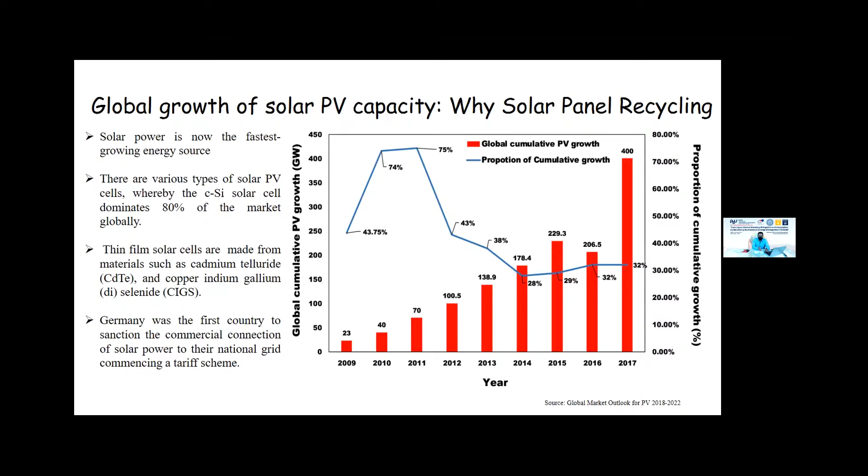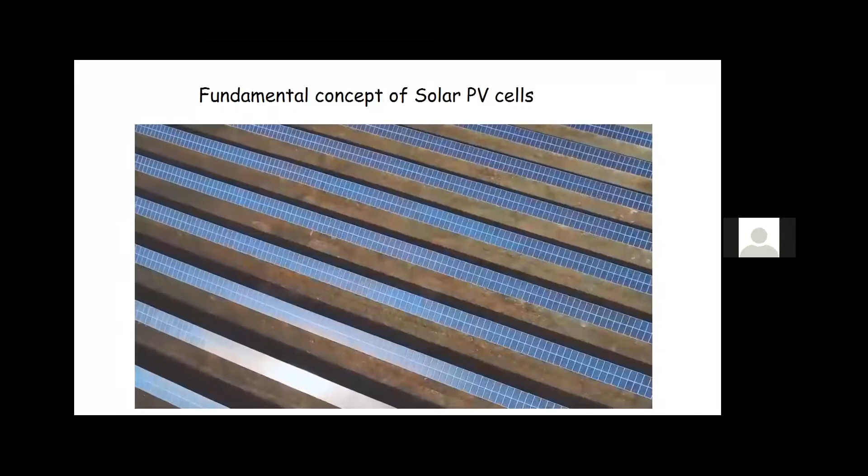Video sound is okay? Yes, sir. We can hear it clearly. At this time, there is no sound, sir. No sound? Yes, sir. No sound. Okay. Okay, wait. Stop sharing.

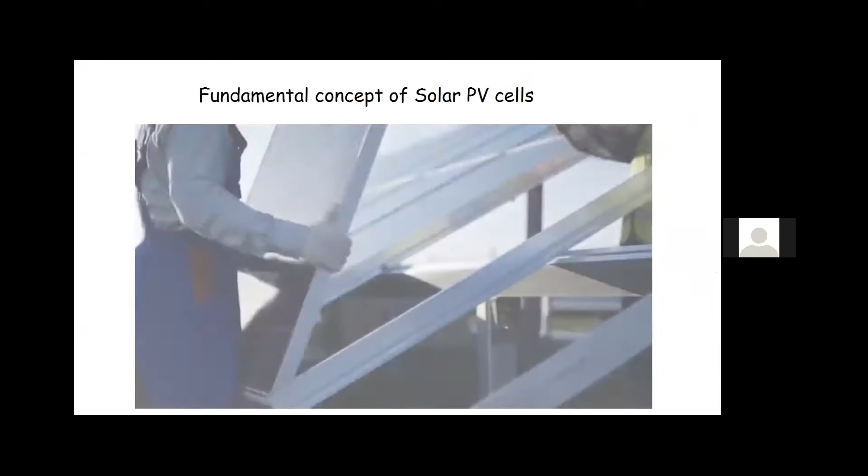This episode of Real Engineering is brought to you by Brilliant, the problem-solving website that teaches you to think like an engineer. Installed global capacity of solar cells has increased year on year for the past decade, fueled by the plummeting prices and rising efficiency of solar cells, forcing fossil fuel producers out of the market through technological advance. At the end of 2019, the total installed capacity of photovoltaic cells exceeded 630,000 megawatts, an astounding figure that is going to continue to rise in the coming decades.

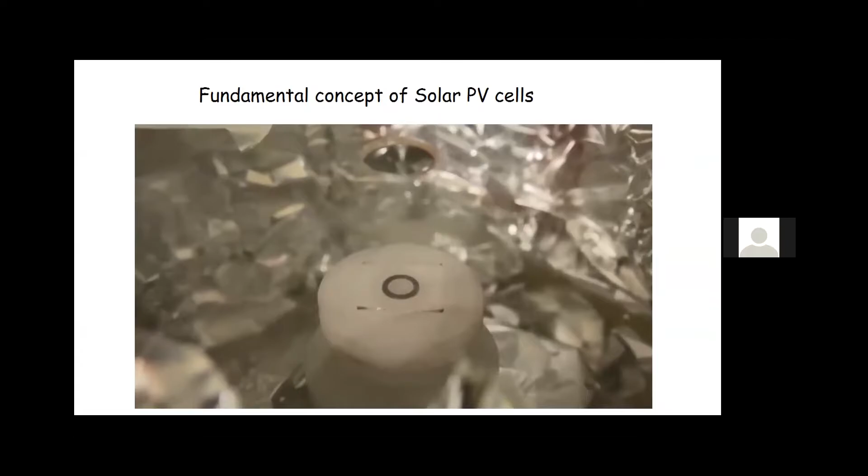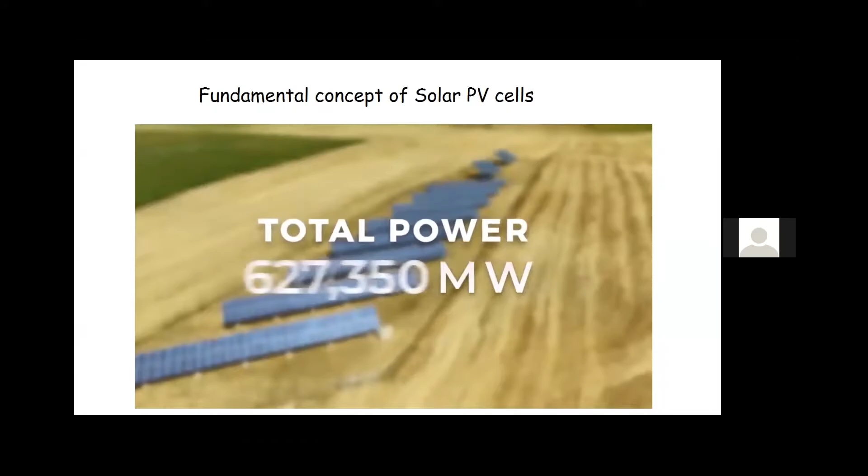However, in the 40 years we've been using solar cells, there has been a mystery flaw that has been sapping away potential electricity from the photovoltaic cells. Upon testing in the laboratory, newly manufactured solar cells display an efficiency of about 20%, meaning they can convert 20% of the incoming energy from sunlight into electric current. However, within hours of operation, that efficiency would drop to 18%, a 10% drop in total electric generation. Losing 10% of 630,000 megawatts of power is no small problem. That's equivalent to about 30 nuclear power plants worth of power capacity if the solar panels could operate all day, which they can't. But you get the point. There's a lot of potential electricity being lost.

It's no wonder that scientists and engineers have been hunting down the cause of this problem, termed light-induced degradation, for 40 years. And last year, we may have finally cracked the problem and found the cause behind this mysterious loss in power. To understand it, we first have to understand how photovoltaic cells work. Photovoltaic cells use the photovoltaic effect to generate a current, an effect where photons of a particular threshold frequency striking a material can cause electrons to gain enough energy to free them from their atomic orbits and move freely in the material. This is best achieved with semiconductors, whose unique properties lying between conductors and insulators allow them to most easily elevate electrons from atomic orbit to moving freely among their atoms.

Some of the first solar cells were created with selenium, like this one, created by Charles Fritts sitting atop a New York roof in 1884. A revolutionary device that produced a consistent current of electricity, but it was achieving an efficiency of just 1%, converting 1% of the energy striking it in the form of light into electricity. This, in combination with the high cost of selenium, made it an unviable source of electricity.

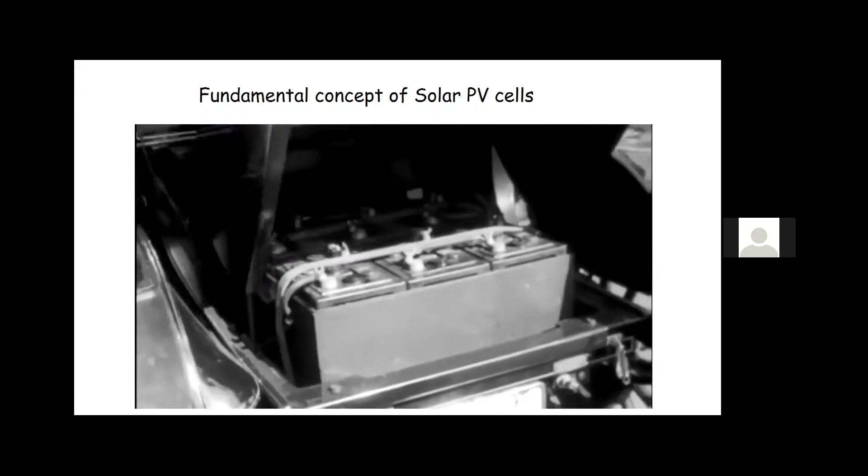To succeed, these devices needed to compete with fossil fuel power sources. Before the photovoltaic effect could power the world, scientists and engineers would need to figure out how to increase that efficiency percentage and to do it with cheaper materials. Enter silicon, a common semiconductor material that has formed the bedrock of the electronic age. This is going to be our starting material for our solar cell. Let's build a solar cell from scratch and see how efficiencies were gradually increased over time.

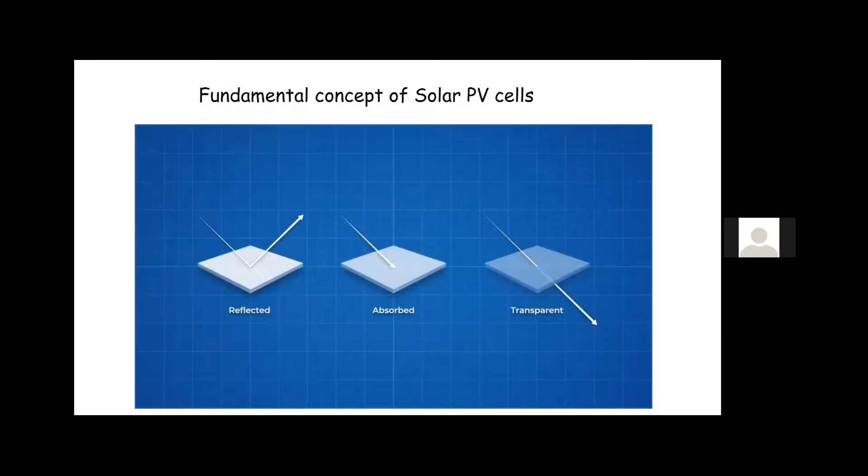Let's first look at what happens when light interacts with a pure silicon crystal like this. Incoming light can do one of three things. It can be reflected, absorbed, or simply pass right through it. If light is reflected or passes through, it cannot produce the photovoltaic effect. Step 1 to improving our efficiency is to minimize the amount of light that gets reflected off the material. This is wasted energy that affects our efficiency level. In fact, 30% of light that strikes untreated silicon is reflected. So, before we even start, our maximum efficiency drops to 70%.

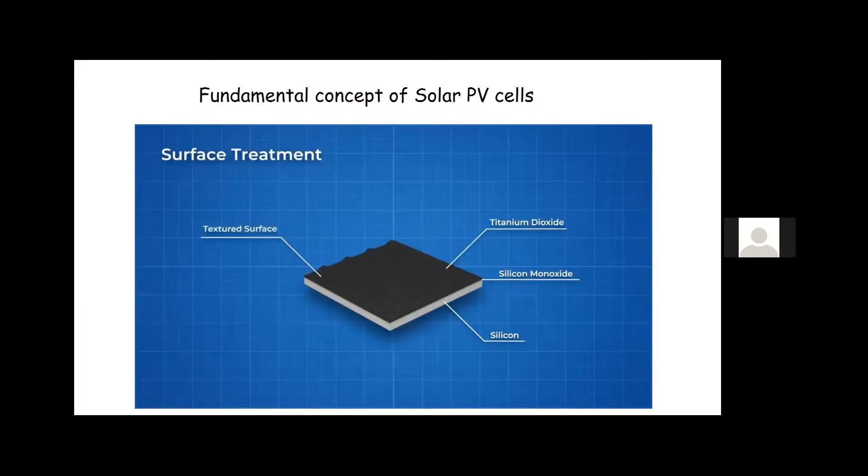For this reason, silicon is often treated with a layer of silicon monoxide which can reduce the light reflected to just 10%, while a second layer with a secondary material like titanium dioxide can reduce it as low as 3%. Texturing the surface of the material can further increase the probability of light being absorbed. If it is textured like this, light that is initially reflected has another chance to strike the material and be absorbed. Only light that is absorbed can potentially cause the photovoltaic effect, but not all light will.

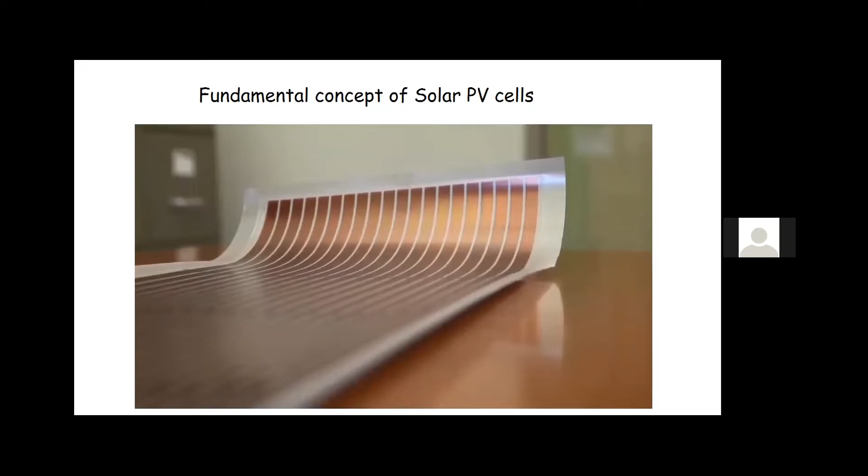We need photons above a threshold energy to increase an electron's energy enough to allow it to move freely in the material. A photon's energy is defined by multiplying Planck's constant by its frequency. Silicon requires photons with 1.1 electron volts to produce the photovoltaic effect, which corresponds to a wavelength of 1110 nanometers. This lies around here in the light spectrum, and any lower energy from here down cannot produce the photovoltaic effect. This light will simply cause the atom to vibrate and create heat.

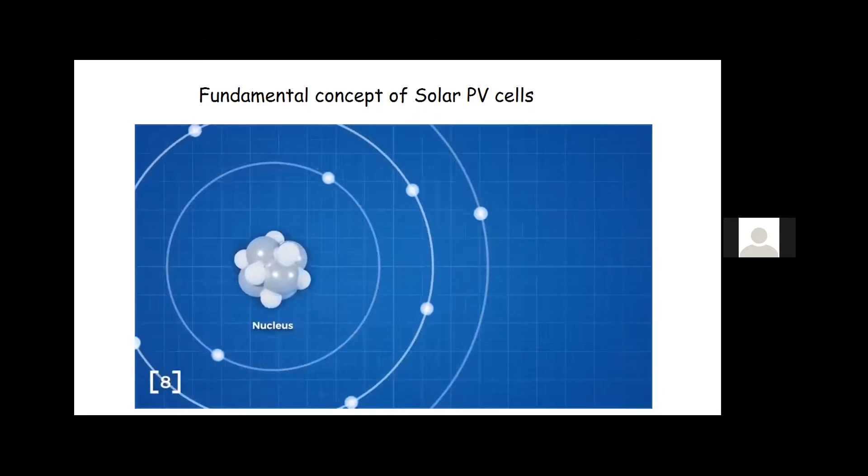Another thing to note is that light with higher energy does not release more electrons. It simply produces higher energy electrons. Blue light has roughly twice the energy of red light, but the electrons that blue light releases simply lose their extra energy in the form of heat, producing no extra electricity. This energy loss results in about 33% of sunlight's energy being lost. So, these spectrum losses alone cause a 52% loss in efficiency.

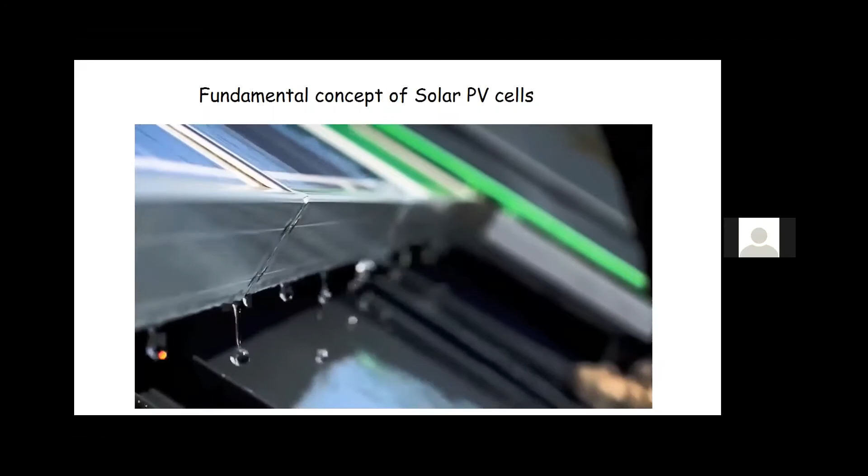This is a lot of energy to lose, but silicon sits near the ideal threshold frequency that balances these two energy losses, capturing enough of the lower energy wavelengths while not losing too much efficiency as the result of the material heating up. This is such a large loss in power that in some climates, active cooling, which takes some of the electricity the panels create to cool the panels, actually results in more electricity being generated. The reason solar panels lose efficiency as they get hotter is quite complicated and outside the scope of this video, but for now, all you need to know is that silicon balances these factors best for terrestrial purposes.

Onto the next problem. Knocking an electron free by itself does not create an electrical current in our circuit. It just frees an electron to move freely about the material. To create a useful current, we have to force this electron around an external circuit where it can do work. Freeing an electron also creates a positively charged hole in its place that is also free to move about the material. If an electron meets a hole, it simply fills it and our energy is wasted. The next trick to maximize efficiency is to limit the chances electrons have to fill these holes and to force them into our circuit as quickly as possible. To do this, we use the unique properties of silicon.

Silicon has 4 electrons in its outer shell, and thus readily forms a crystal structure with 4 neighboring atoms using covalent bonds, a bond where neighboring atoms share an electron pair. We can manipulate this behavior and tailor the crystal's material properties by adding impurities called dopants.

Say we add boron atoms to the silicon crystal wafer. These boron atoms have 3 electrons available for bonding with the silicon crystal, but silicon wants 4, so this creates a hole in the crystal that wants to be filled with an electron. We call this a p-type, as it has positive charge carriers.

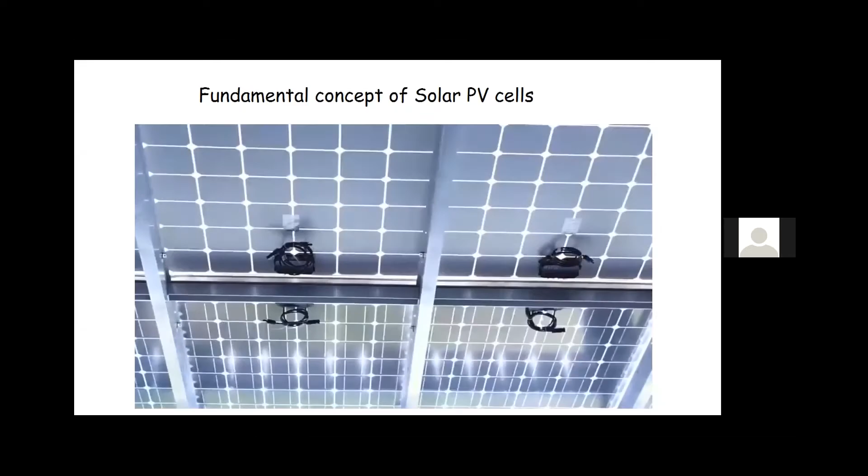You may notice a problem here though. By adding metal contacts to the upper surface of the solar cell, we've just blocked light from entering the cell and thus reduced its efficiency. This is yet another problem engineers have had to think carefully about in their quest to optimize solar cell efficiency. Over the years, engineers have optimized both the shape and manufacturing techniques to minimize the area covered by the metal electrodes, while also minimizing the resistance the electrons will face in entering the external circuit.

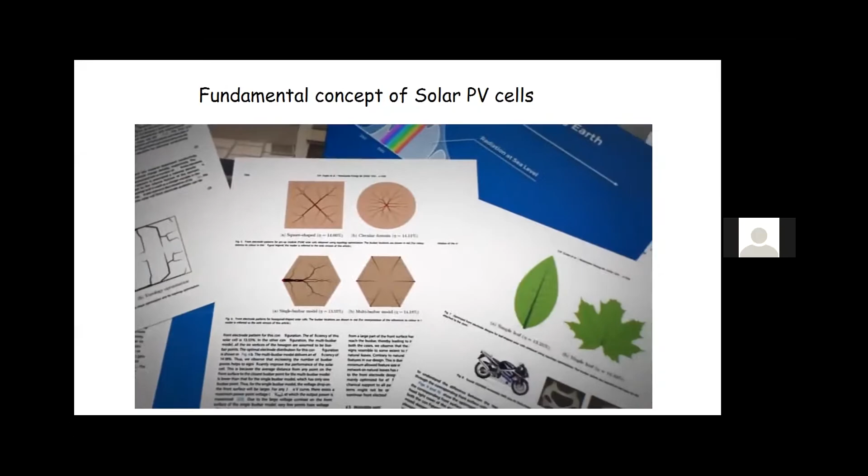One research paper used topology optimization to design these electric contacts. Topology optimization uses algorithms to optimize the design of objects using constraints the engineer inputs. Using this method for the electric contacts produced something remarkably like the vasculature of a leaf. That shouldn't really surprise you. Vasculature on a leaf does not perform photosynthesis. It instead brings the water that is essential for photosynthesis to the leaf and extracts the useful products, serving a similar purpose as our electric contacts.

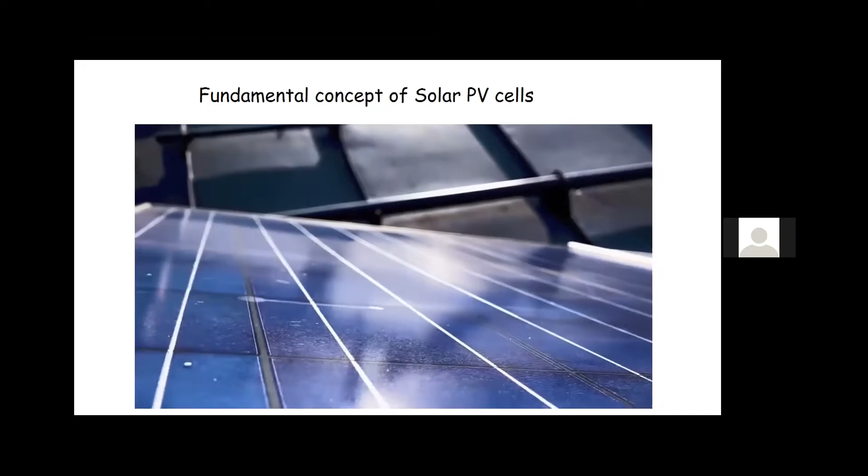So, of course, plants have developed the perfect shape to optimize the energy they can absorb from the sun. Plants have had millions of years to evolve this shape. However, most solar cells use a simple grid shape, as it is cheaper to manufacture. This typically results in an efficiency loss of about 8%. All told, these effects result in a typical modern solar cell having a laboratory-tested efficiency of 20%. So, what was happening to cause that drop to 18% after a couple of hours of operation?

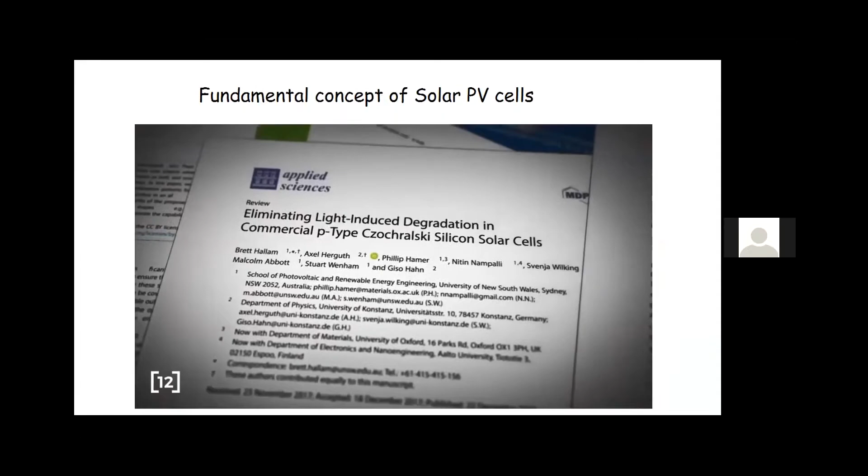This problem was the focus of hundreds of scientific papers, and many found clues to the problem. Many noted that the efficiency drop was correlated to the concentration of boron and oxygen in the silicon, and noted that the drop did not occur when boron was substituted with gallium. Thus, it was known a boron-oxygen defect was causing the issue. Others found that the defects could be reversed by heating the silicon in the dark at 200 degrees for 30 minutes, but it would return once again upon exposure to the light.

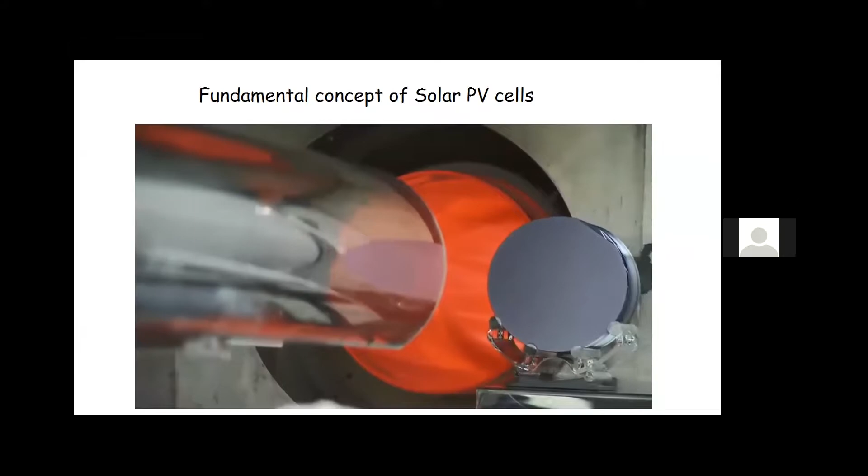Efforts in reducing the problem have primarily focused on reducing the concentration of oxygen impurities in the silicon wafers, which occur as a result of the silicon manufacturing technique that is the source of 95% of silicon solar cells. These manufacturing techniques are still a point of research, and the engineers and scientists were working blindly. Little was known about the actual defect creation process and how exactly it was causing such a large drop in efficiencies, leaving engineers with less information to solve the problem with.

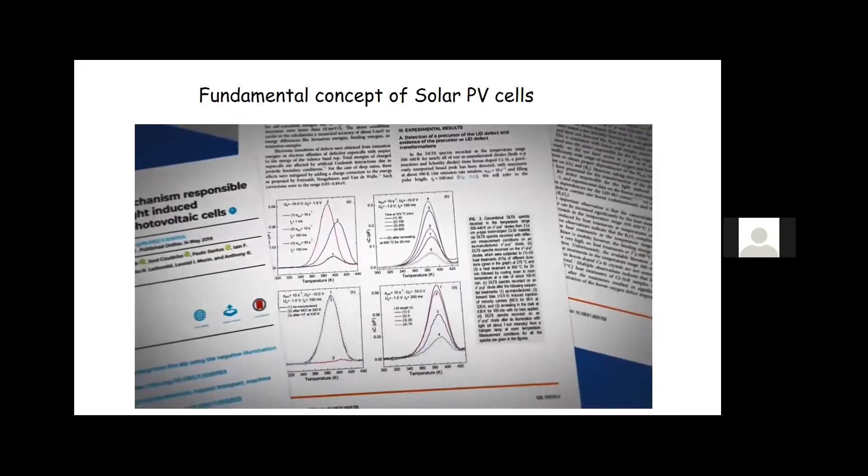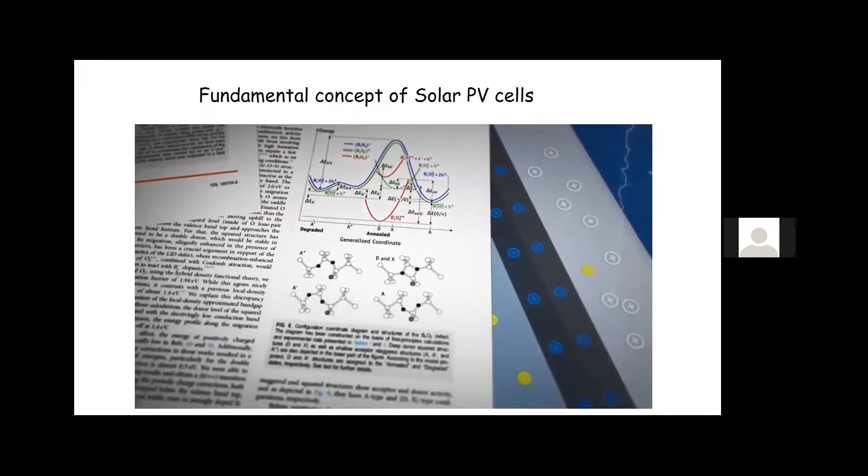This paper used a special imaging technique and observed these boron-oxygen molecules converting into something the paper refers to as shallow acceptors when exposed to light. In essence, they observed the defects transforming into little electron traps that acted as recombination sites, and thus reduced the time and probability of electrons entering the circuit to do work. With this knowledge, engineers can now develop better techniques for preventing this phenomenon and hopefully increase our renewable energy capacity in the coming years.

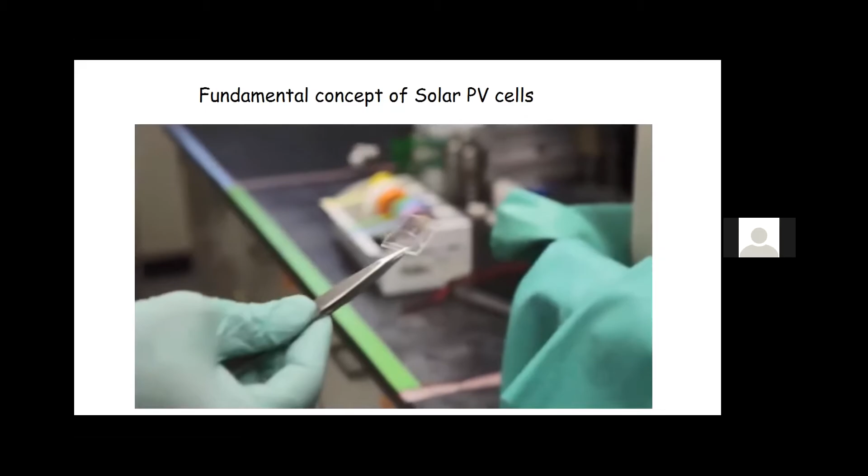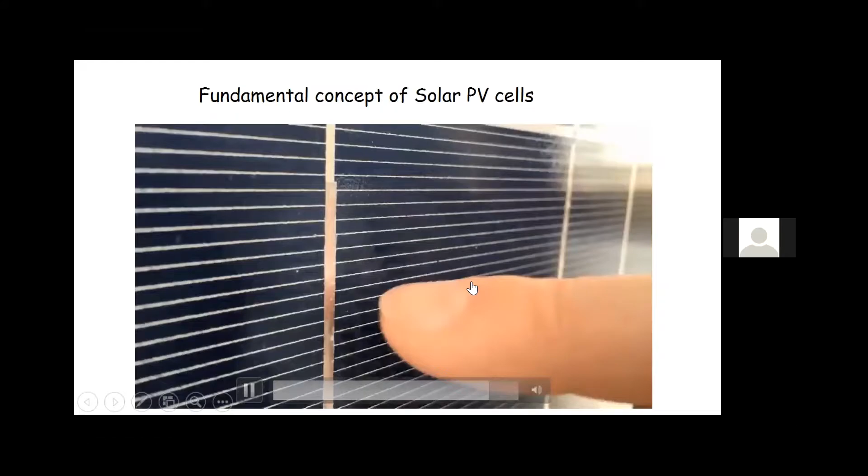It's easy to think that technology has reached a point of being so advanced that knowing where things can be improved is practically impossible for the average person, but that simply isn't true. A little bit of research into any area will reveal countless problems humans are still grappling with fixing. When I started researching this video, I knew little about solar panels beyond the basics. In order to make this video, I took a week to deep dive into some college textbooks using my knowledge of material science and electronics to guide my research. But I had some gaps in understanding that the college textbooks just assumed I had pre-existing. This episode

Hello. Yeah, this is the structure of material and manufacture of solar cell, the story of solar energy. So how can we manage the solar waste? So reduce, reuse, and recycle. That can help us to protect our environment, as research and development and technology advance continue with a maturing industry, and the composition of a panel is expected to require less raw materials. And secondly, rapid global growth is expected to generate a robust secondary market for panel components and materials. And third, as the current photovoltaic installations reach the final decommissioning stage, recycling and material recovery will be preferable to panel disposal. This is the scenario of solar photovoltaic waste.

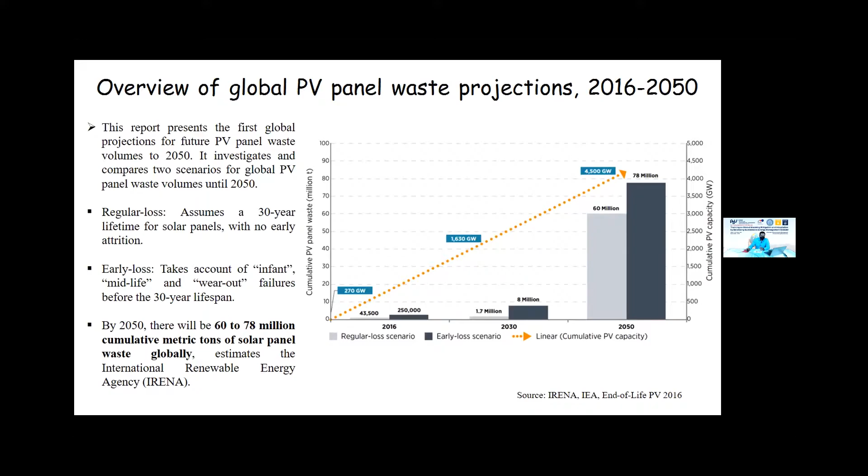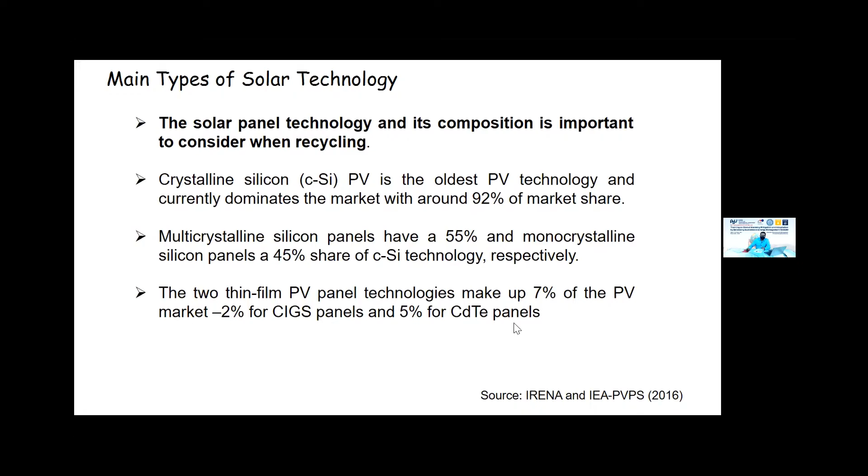The main type of solar technology currently available is silicon based solar cells. So solar panel technology and composition is important and considered when recycled. Silicon based solar cells have two types, monocrystalline and polycrystalline silicon. Multi silicon panels have a 55% market share, and monocrystal silicon panels 45% market share. And also there are other solar panels like thin film based solar panels, CIGS, CdTe. They are also available in the market, but in future we need to recycle them. And this is the market share.

Last time I showed you that market share in 2014: it was 92% for silicon based first generation solar cell, 7% for second generation solar cell, and third generation solar cell 1%.

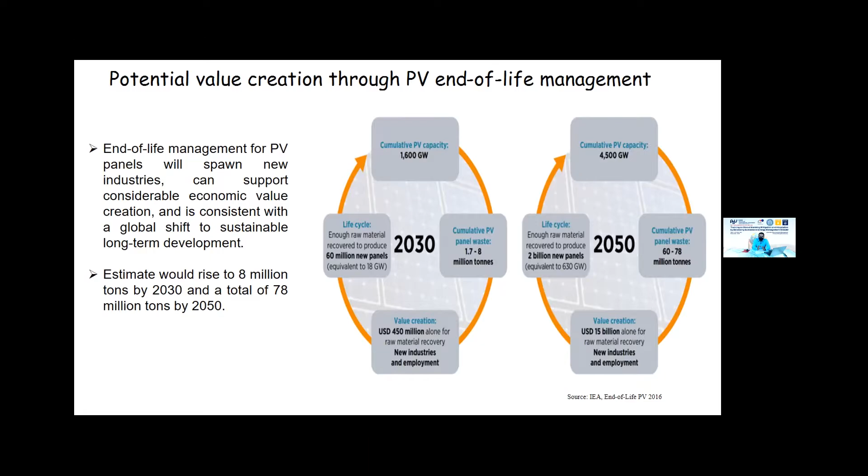But we can think about that. There is many reasons for the solar panel breaking. Not only lifetime, there are many losses, like unknown defect and transportation damage, frame loss, manufacturer loss, and some solar panel lose efficiency due to manufacturing and optical failure. There are many reasons, not only lifetime, solar panel can become waste. Also the weather condition, because sometimes windy weather or natural disaster can also destroy our solar panel.

So, is it possible to recycle a solar panel? What do you think? So we can see one documentary.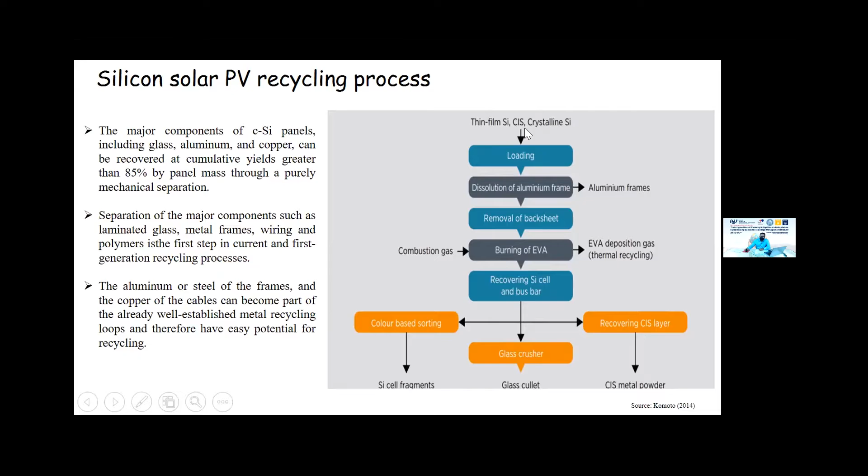How can solar panel recycling of ingot parts work? What they did was surface cleaning first, then surface cleaning and etching by chemicals, preparing the surface for reuse.

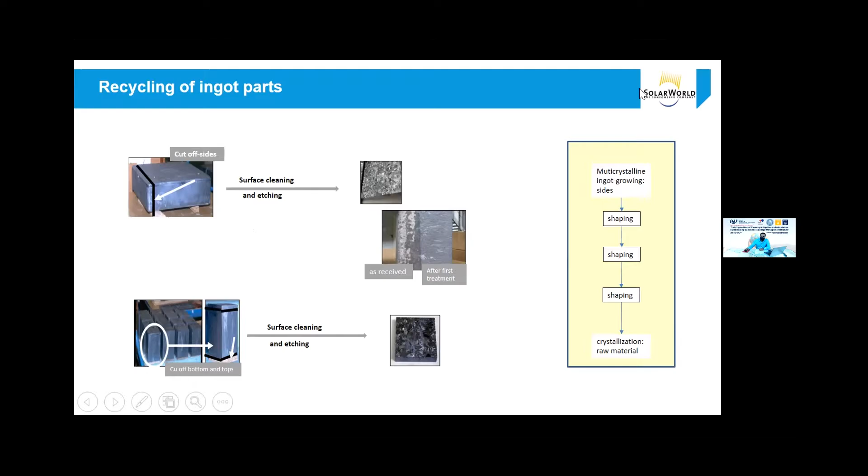In recycling technology, we know there's thermal process, mechanical process, and chemical process. This is mechanical separation for laminated glass recycling - we can see high capacity is available, and if we use that method, it's a universal process with impure fractions.

We can also see thermal separation just for the EVA layer. Thermal separation is normally used to remove the EVA layer, and this is a very universal and cost-effective process.

For material separation, we use waste gas cleaning, dust removal, and chemical processes - this chemical process only focuses on the thin film module, and there's a cost for waste treatment of chemicals, with strong dependency on the material used. We can see this as well.

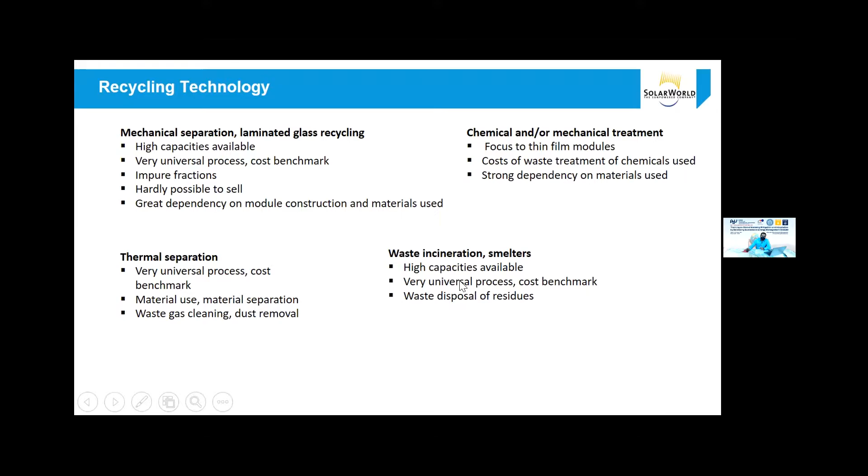Now I would like to show you one recycling process - how they recycle - through a documentary.

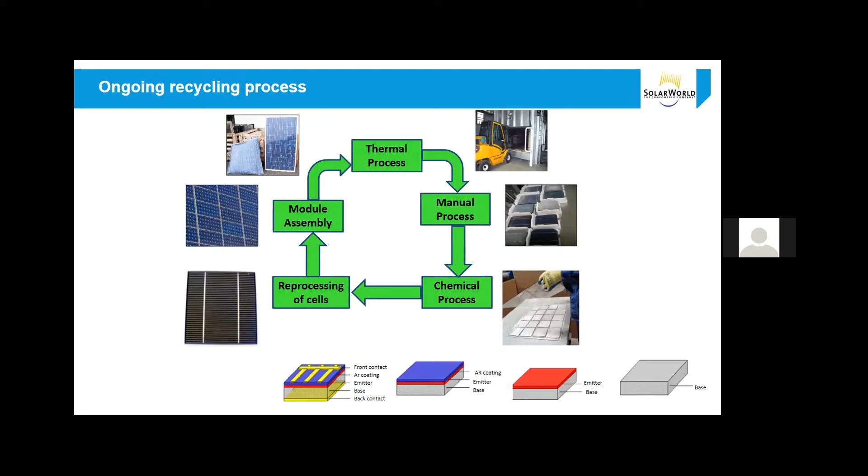This solar panel was collected from Belgium, installed in 1983. It's an old solar module, double glass module with stainless steel frame, 4-inch monocrystalline cell type, and the back side metallization uses silver as a conductor, with silver EVA polymer lamination. This is the structure, 36 cells per module.

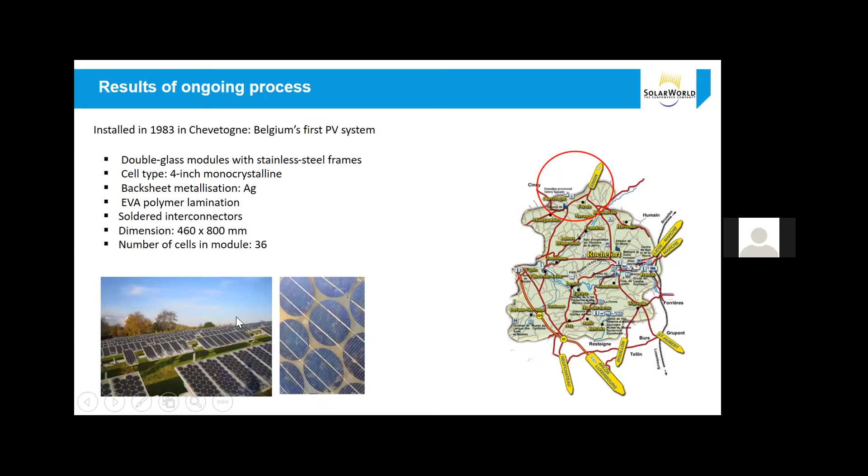They also showed the current situation and rate of whole cells: predominantly damaged product, reduced valuable metal, wide variety of module types, and reduced cell thickness. This is the rate of whole cells we can see.

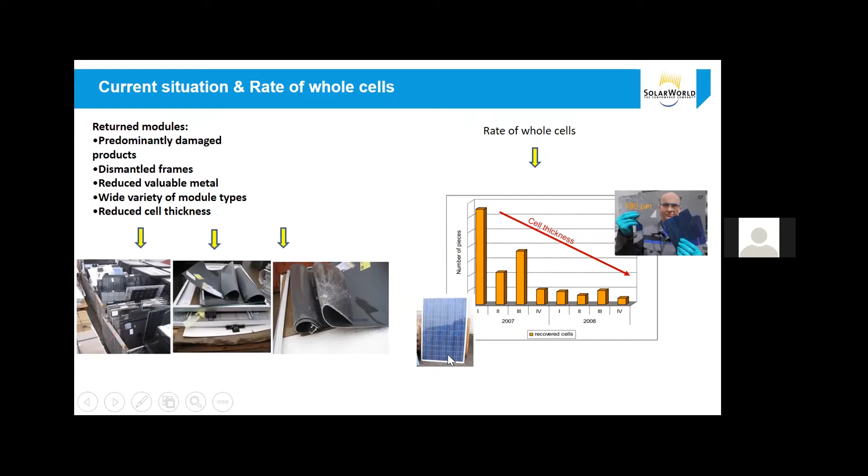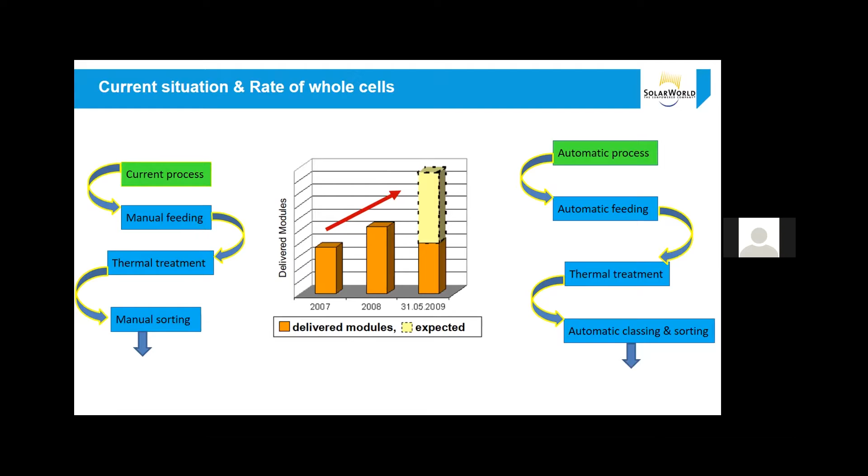If we do the recycling, what happens in the future? This is the ecological assessment, or life cycle assessment. After recycling, the recycling of the module was evaluated concerning its environmental effects by a life cycle assessment for all impact categories. The disburden due to the reuse of silicon material and glass is higher than the burden on the environment. So if we recycle it, we can reuse it, and they show the recovery rate.

Silicon recycling is 75%, and other waste would be 10 to 20%.

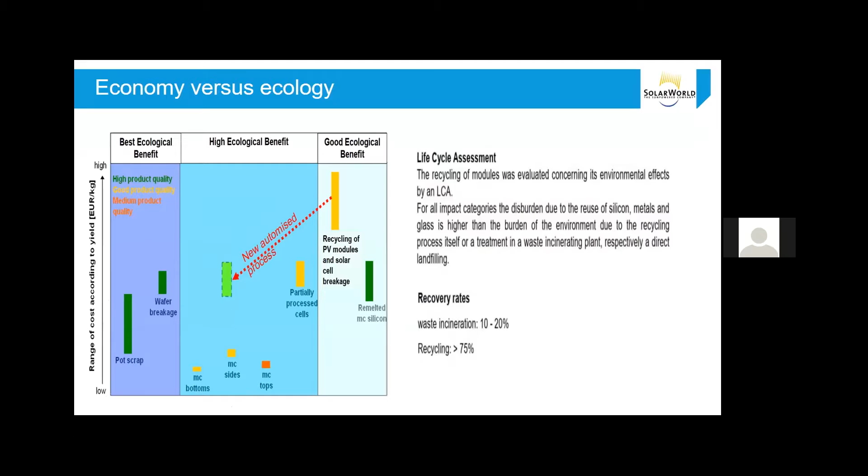We can also see the economical value - 90% we can recover. As I mentioned earlier, it's possible also, but we need international collaboration, and companies need to make policy. There are many things to consider.

Let's start about second generation solar cells, CdTe thin film solar cell, because we know that thin film based solar cell is fabricated by hazardous material like CdTe, cadmium telluride, or CIGS.

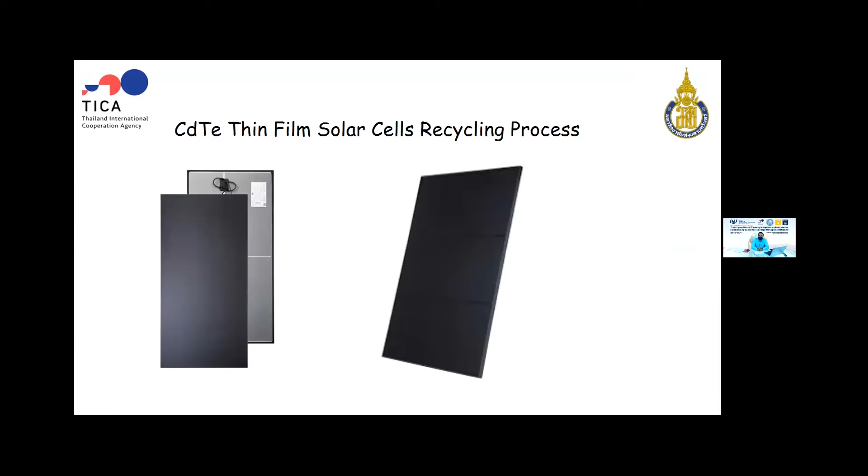This is the process of First Solar. They follow this strategy for solar cell recycling because First Solar is the only company that produces only CdTe based solar modules. They manufacture only that one, and their recycling process - the panel recycling process for First Solar solar panels - uses this strategy. We can see the prominent example of this process includes the following steps.

Some researchers showed their opinion that it's possible to recover 90% of glass and about 95% of semiconductor materials.

We can see panels are shredded and crushed in a hammer mill. During mechanical separation, they use the hammer mill to mill the solar semiconductor materials down to about 5 millimeters, to break the lamination bond and separate it from the EVA layer. The dust is then collected in an aspiration system equipped with a high efficiency particulate air filter.

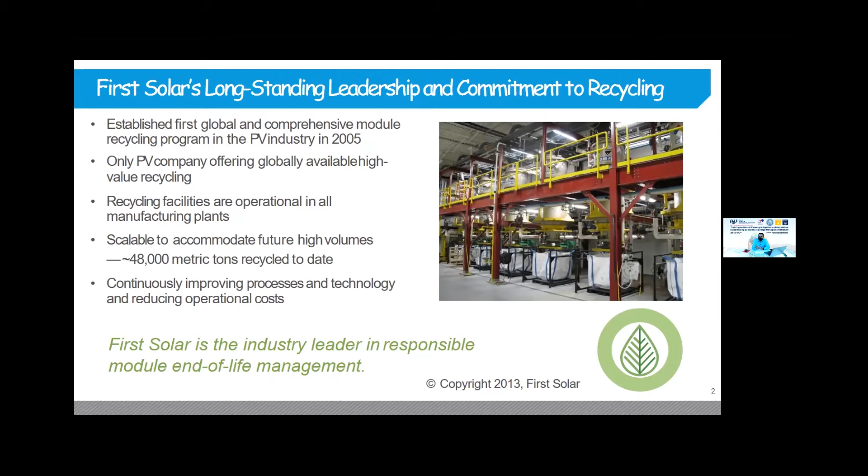We can see that they established the first global and comprehensive module recycling program in the PV industry in 2005. They are the only PV company offering globally available high value recycling, and recycling facilities are operational in all manufacturing plants. Scalable to accommodate future high volume. 48,000 metric tons recycled to date, continuously improving process and technology, reducing the operational cost. So primarily they are now doing recycling, but they try to improve the technology to reduce the cost.

And we can see that First Solar product development is striving for continued improvement of their technology and ensuring the recyclability of the fully integrated module. They are trying to develop a recycling-friendly design, and they try to develop a budget for the recycling plant. And they also follow the CMS, change management system. This is their strategy.

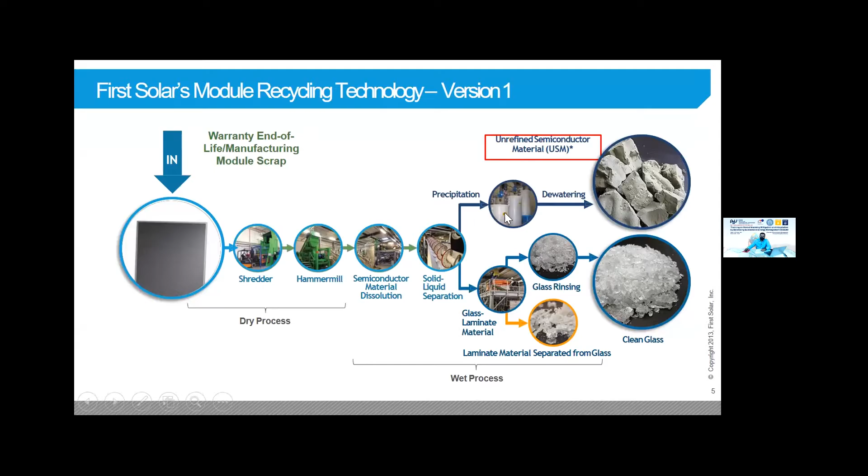So this is the First Solar module recycling process, how they recycle with their own recycling plant. Size reduction, filtering, and a third-party refining process for the semiconductor CdTe. For CdTe, we can see the main leach, copper treatment, tellurium reduction, cadmium precipitation, and how they separate CdTe.

For product recovery and quality, they ensure that 90% of module weight is recovered, and most of the glass can be recovered, and the glass will be reused for new glass production. And also the cadmium recovery is 95%, and they can make a partnership with third parties for producing new solar modules.

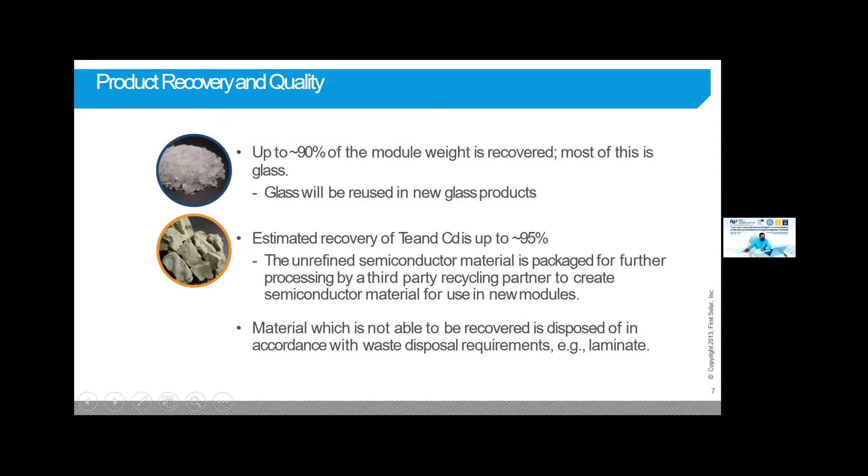So they have three recycling periods. Period 1 and period 2 in 2006 were based on an industrial batch process, with a volume output of 10 tons per day and capital investment of $5 million. And in 2011 they increased their volume output to 30 tons per day, with investment of $7 million. So this is the First Solar recycling process. We can see the video.

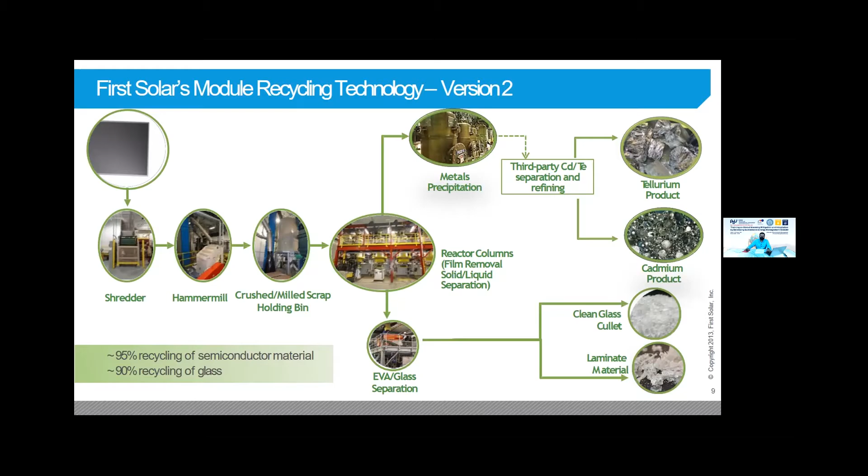And the third generation is a continuous process, more efficient, 24 hours, 7 days, 30 tons per day capacity, and high quality, and they are targeting cost below hazardous waste disposal by 2015. They had a target to reduce the cost of hazardous material disposal and recycling facilities.

They are committed to establish recycling projects in each country. For example, for the Asian region, they have a plant in Malaysia for module fabrication. So at the same time, they will collect their modules from the field after they become waste, take them back and recycle them. And they think they can recycle at least 350 tons per day.

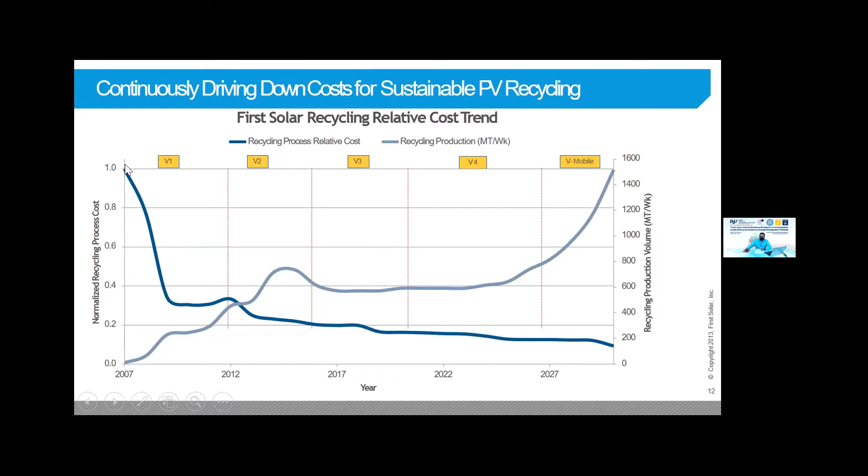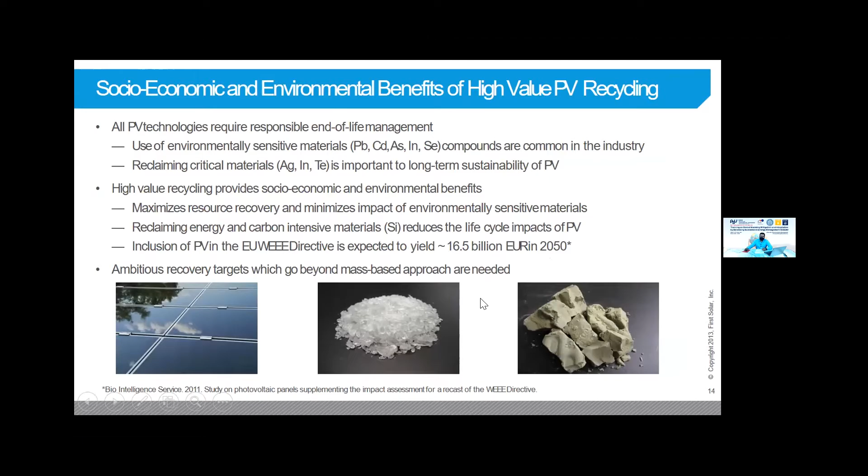So the socio-economic and environmental benefits of high value recycling, like the use of environmentally sensitive hazardous materials, CdTe, lead. It can be recycled and reused for second PV fabrication, and other materials can also be reused in the industrial sector. If we do that, they expect 16.5 billion euro by end of 2050. A huge industry for the future generation.

And ensuring the supply of raw materials, the maximum resource recovery, 10 to 50% if we produce. And also they are committed that in future they will produce new solar modules from recycled materials, 10 to 50%. They reuse it, because when they recycle, they ensure the quality, and they reuse it for producing a new solar panel. And also improve the material efficiency,

ensuring after recycling we also have to ensure that it can be reused, because there is no benefit if we recycle and the material cannot be reused after; it's not efficient, the module efficiency is not good, so that is the thing. So

now third generation solar cells; actually we know that third generation solar cells are still under research. That is my own work I did in 2019 in Malaysia. Is it possible to recycle? Because for sustainable development, we need to think before launching any product: after it becomes waste, how can we reuse it? Because otherwise we will use many hazardous materials. Is it possible to recycle?

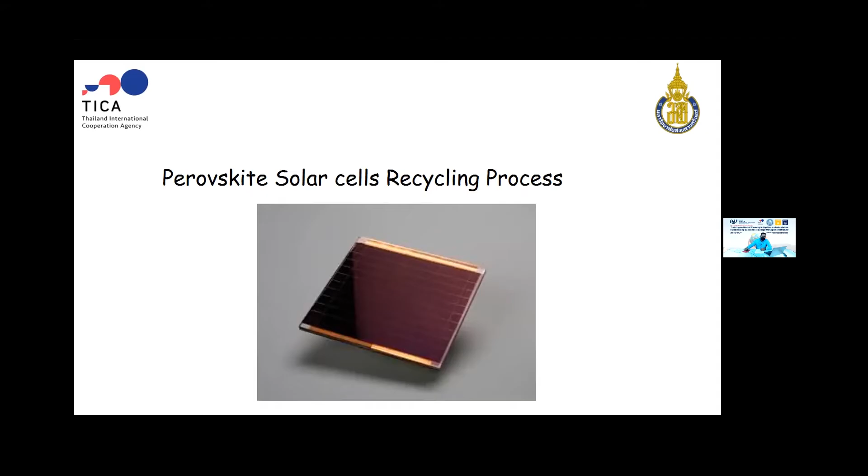So my work was to fabricate a new solar cell and ensure a unique method for recycling. So this is the layer by layer separation process. First, we fabricate the planar structure perovskite solar cell, and then we recycle, using a four-step method, layer by layer separation.

First, chlorobenzene solution is used for 3 minutes to remove the gold layer, because as an electrode we use gold, and Spiro-OMeTAD for the HTM layer. So we remove it by using the chlorobenzene solution, and after that we use DI water to remove the methylammonium iodide, and after that use DMF solution for two minutes to remove the lead iodide.

Last but not least, DMF solution for 10 minutes to remove the TiO2 layer, and we successfully recover the FTO substrate. Because in the perovskite solar cell we use an FTO substrate, we can also recover the FTO. We tried so that we can reuse the FTO after recycling, recovering all materials. Just the glass and FTO substrate, we keep it and we can reuse it.

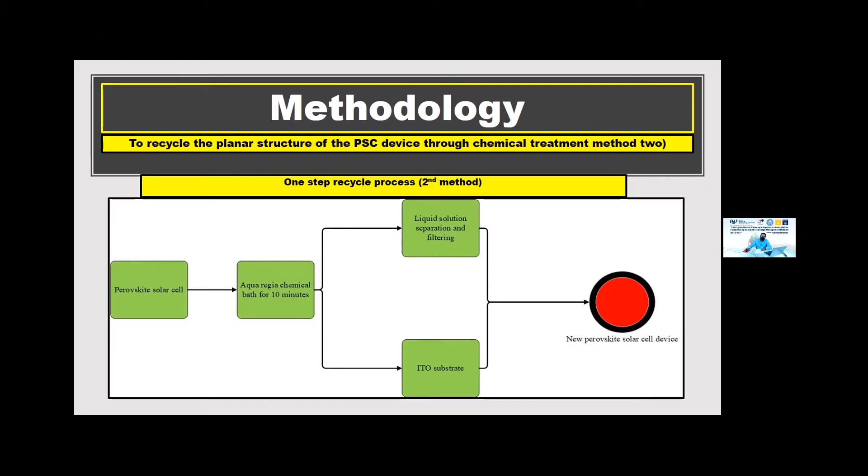So in the one-step method, we just use aqua regia solution for 10 minutes, and it can help to recover the ITO substrate without any effect, a little bit, but not a big effect. And it separates the other chemical components in one solution, Spiro and lead, methylammonium iodide, TiO2, all in one solution, and we successfully recovered the ITO substrate for fabricating a new solar cell.

This is my working time, when I fabricated the perovskite solar cell, and I got 7%, 6.215% efficiency, and due to the stability issue, it degraded. So how can we ensure the quality of recycling, like in future when it becomes available in the market? So how can people trust us? So there are many explanations.

For example, we use FESEM. This is the SEM result. This is the full cell, after the full cell fabrication: this is the gold layer, the Spiro-OMeTAD layer, and this is the perovskite layer. Perovskite layer means the methylammonium iodide and methylammonium lead iodide, and this is the TiO2 layer. The perovskite layer thickness was 300 nanometers, Spiro 80 nanometers, gold 40 nanometers, and TiO2 80 nanometers.

And the FTO we collected is commercial FTO from Sigma, and the FTO thickness was 500 nanometers. So this is the comparison between after recycling and fresh FTO. This is the fresh FTO, and this is the recycled FTO, and we compare it, and there is no change after recycling. This is the one-step method result. So we can ensure that the thickness of FTO after recycling has no change, so we can reuse it.

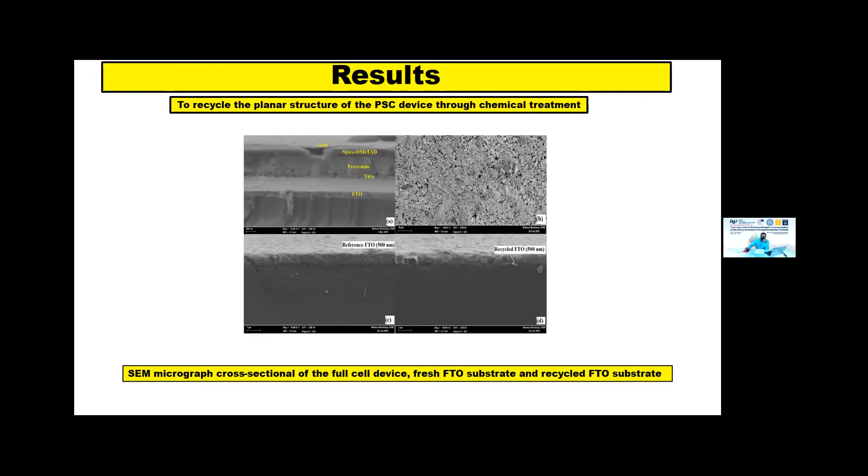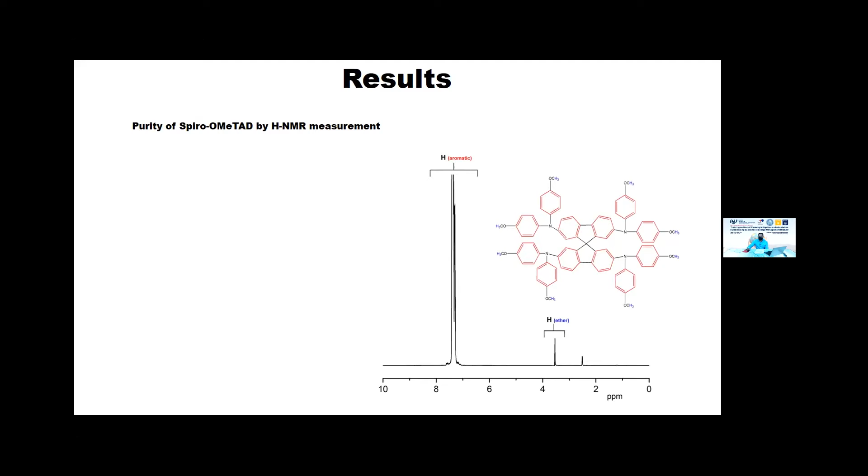So, the quality of the spiro: when we did the process chemical solution treatment, is there any effect on chemical bonding? We can see this is the NMR after recycling, and we can see this is a benzene structure and aromatic group. We know the benzene aromatic group is in spiro, so we can ensure the quality of the spiro.

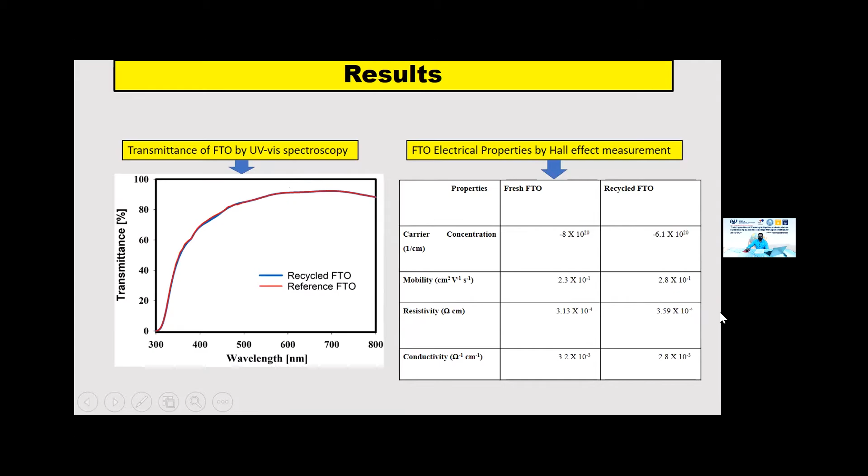Earlier we mentioned that if transmittance and absorbance are not good, we cannot get efficient electricity from the solar module. Because we use FTO for transmittance, we checked the transmittance of FTO using UV-Vis, and there is no big change between recycled and fresh FTO. These are the electrical properties, and there is also no big change, which ensures the quality of FTO.

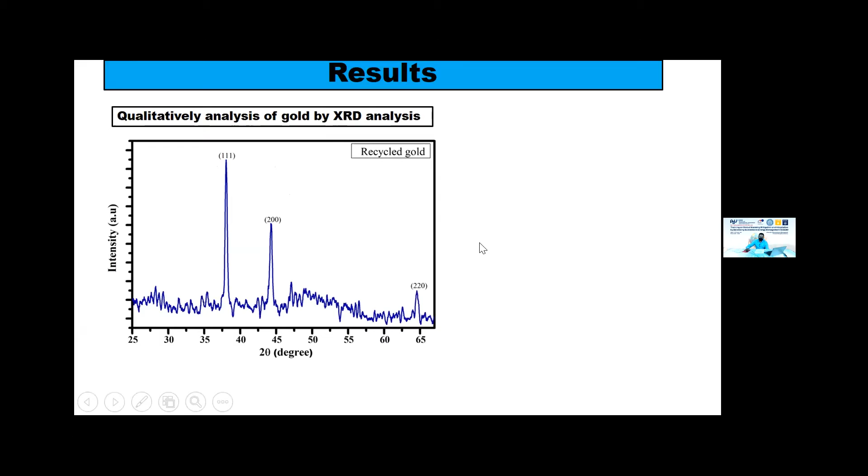And we checked the gold after recycling to ensure its quality. Is there any change in the purity of gold? No, there is no big change. And we compared with the literature review, and that all ensures the quality.

And this is ITO-based, a one-step process. It has a few changes due to time limitations. We haven't continued after that because COVID came and we could not access the lab. That's why it's still pending, with only two results. I believe that in the future it can be developed at industrial level.

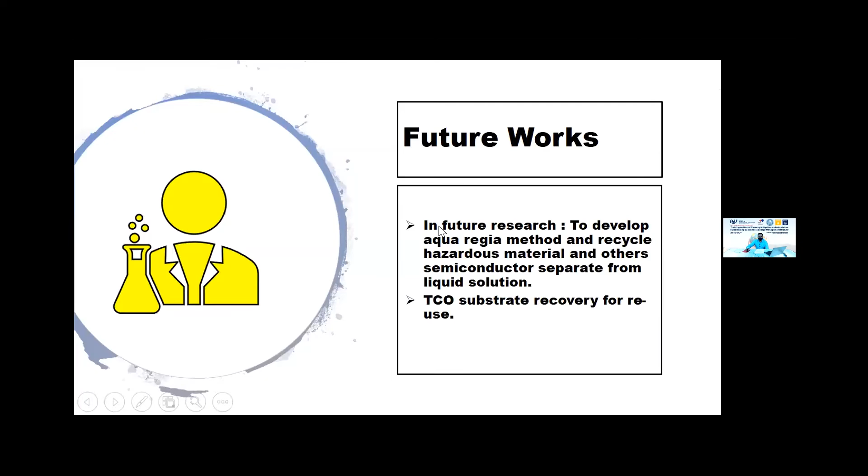Okay, before I discuss that, are there any questions regarding perovskite recycling? Hello, sir.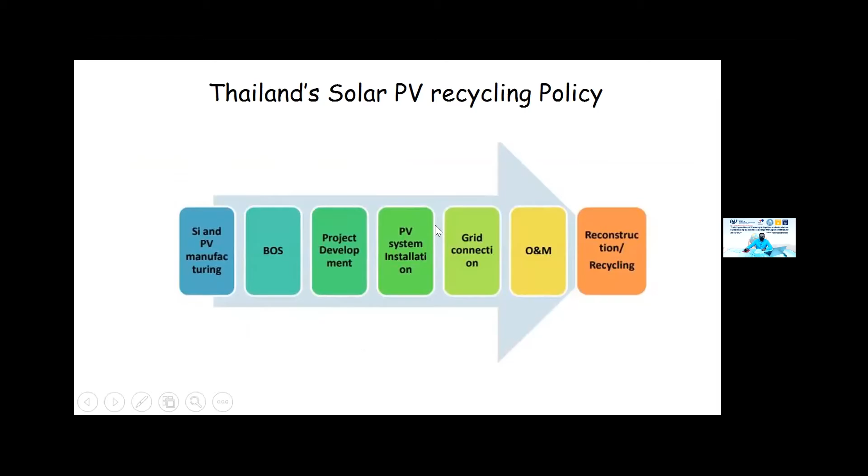So recently the Thai government has some initiative for solar waste. They already took one initiative. Maybe very soon they will start a recycling plant in the near future. This is the government policy for recycling solar modules.